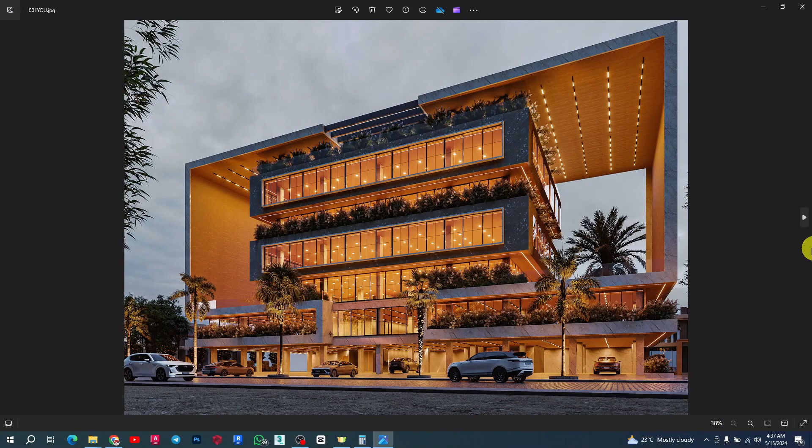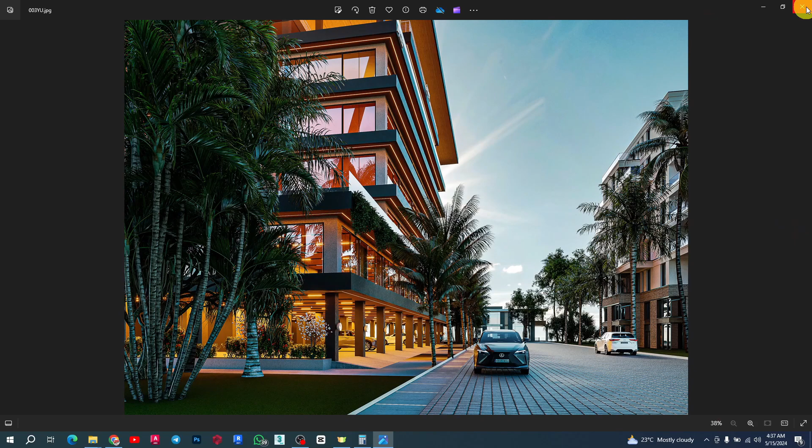The bad news is my client refused that I should expose the detail of his project to you guys. He said it's not good for him, he cannot accept that I do it on YouTube. So we are not going to work on this one, and we will not work on the third one either, because they are considering choosing either of them for their shopping center design. We proposed three designs, and they have to choose one. So they are going to choose among two, and we are left with just one option to go with.

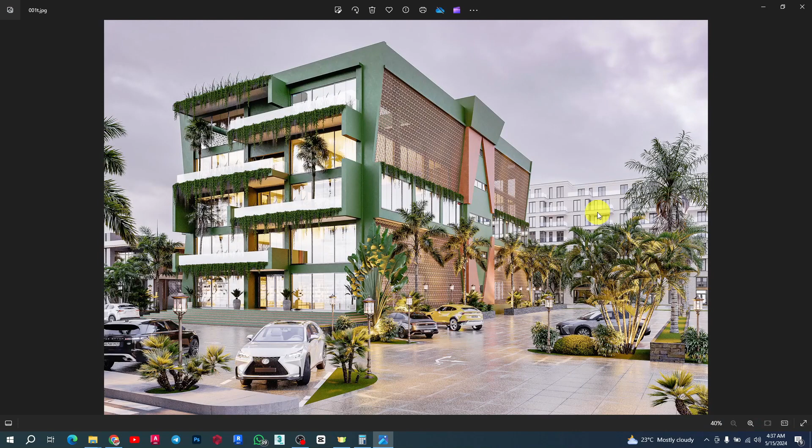The option we are going to go with is the second one that we had instead, so we'll be designing with this one from start to finish. I think this is not bad, it's the same principle that applies to the other one. So this is what we are going to be having. I'm going to show you how to achieve this by using curtain walls and all the tricks behind it, and how to render it to look like this, and do the structure. So without further ado, let's jump right into the tutorial.

We received a brief from a client who has a land measuring 40 by 70, that is about 2,800 square meters, and he needed a shopping center there.

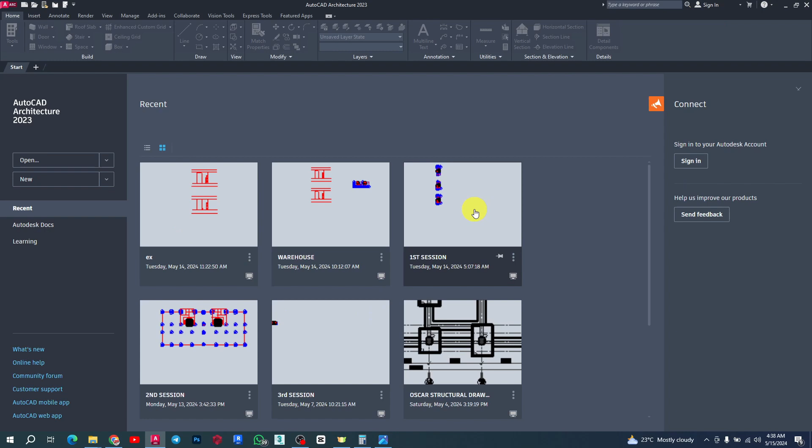Usually when we get briefs from clients, this is what we do, it's different from how any other person goes about it. We visit the site, do some site analysis, then try to sketch, do some pencil drawing to come out with shapes that will probably fit well, thinking about the aesthetics and ambience, and do some environmental impact assessment. We work around that to make sure we have a very good design that will suit the environment.

After that, we usually move to AutoCAD to do some line work, to come out and put the idea in place. We use that line work in AutoCAD to come out with some ideas.

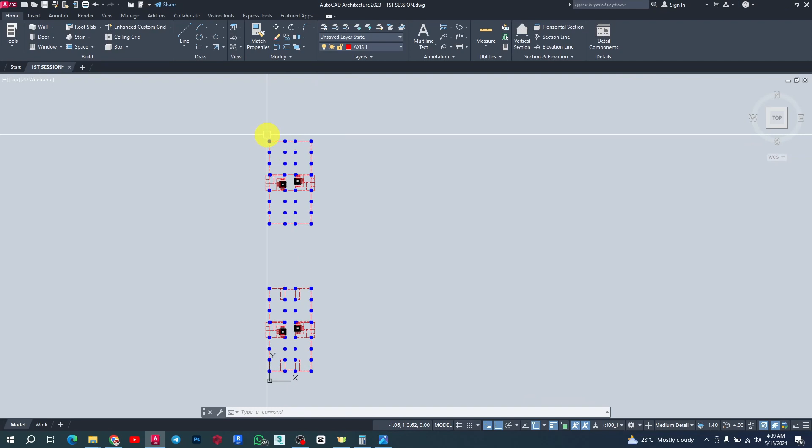On this project, the client has a land of 70 by 40, with a road on both sides of the land, on this side and on the other side, and both are main accessible roads. The client wanted a situation where they can access the building from both sides, so these are still part of his brief. You can enter the shopping center from this side or from the other side, as they are all main accessible roads.

He wanted a shopping center on the ground floor and also on the first floor, like the main supermarket itself, and on the second floor we're going to have shops divided for renters. None of the shops should have a surface area less than 30 square meters. I'm just reading through the brief, I will not want to expose all of that to you.

On the third floor, he wanted to have an African cuisine restaurant. The main focus is that everybody should pass through the shopping center on either side before going to the last floor. They should have a control and lobby area so people always have the opportunity to shop through the ground floor, probably when they are leaving, to buy one or two things.

We had to take care of the traffic at the ground floor, because this is still where we have the control post for payment. On the last floor, it's meant to be an open terrace used as open cabaret or snack bars, and it should also have two swimming pools on two sides of the building so people can be having live music this way and the other way, without being disturbed by activities on the other side.

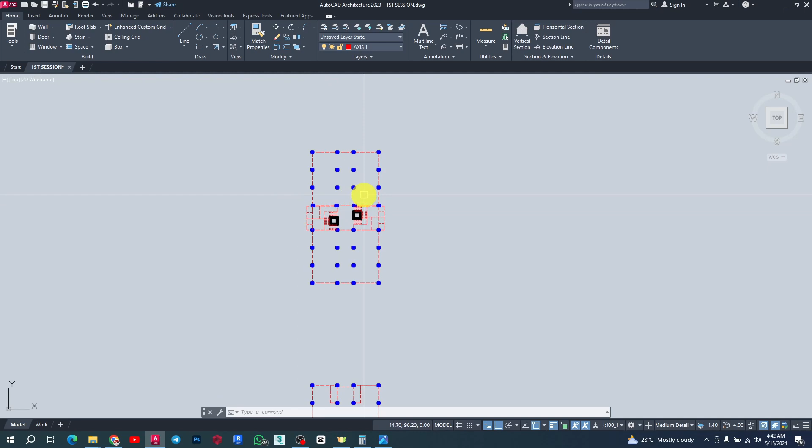And the other side too, and we still have the same thing on the first floor. All of these columns run from ground floor, from basement. There's a basement used just for storage, not for parking. It runs from basement up to the fourth floor, so all of the columns are continuing from the basement to the fourth floor.

What we have here is a main entrance, and the control post will still be on the same entrance point, on both sides of it. Then people enter through here and use either the lift or the staircase up.

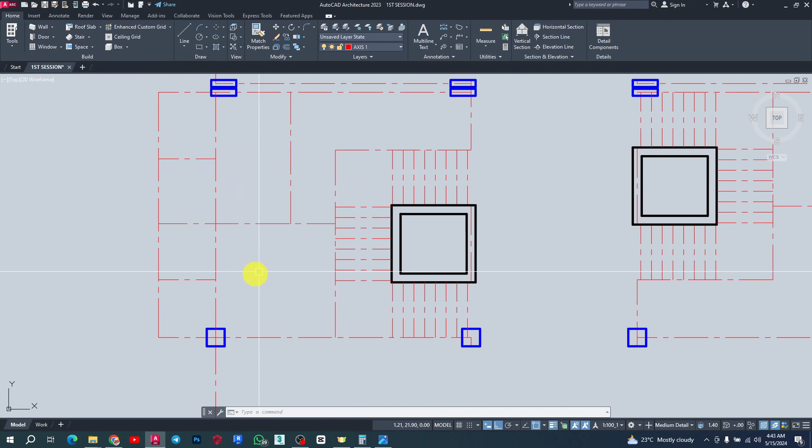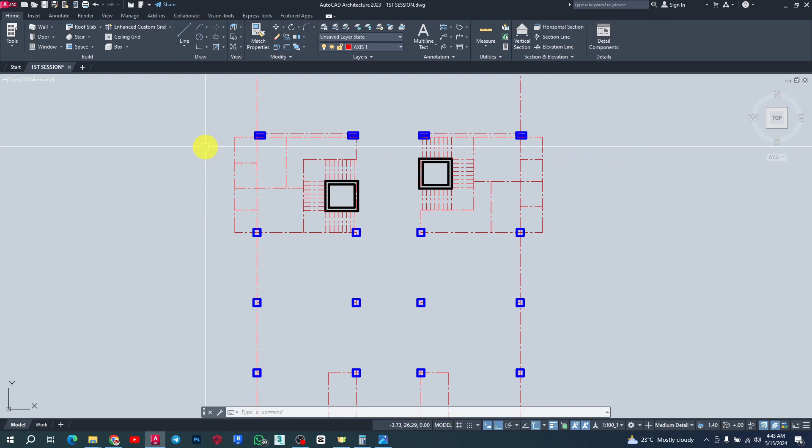On both sides of this circulation area, this lobby area, we have restrooms for both male and female sections, because we are going to have urinary pots here. We have it on both sides so people can use this without inconveniencing any activities, and they can be controlled on their way out. In terms of security, we won't put cameras in the restroom, but these are areas where we have really high criminal activity in most shopping areas.

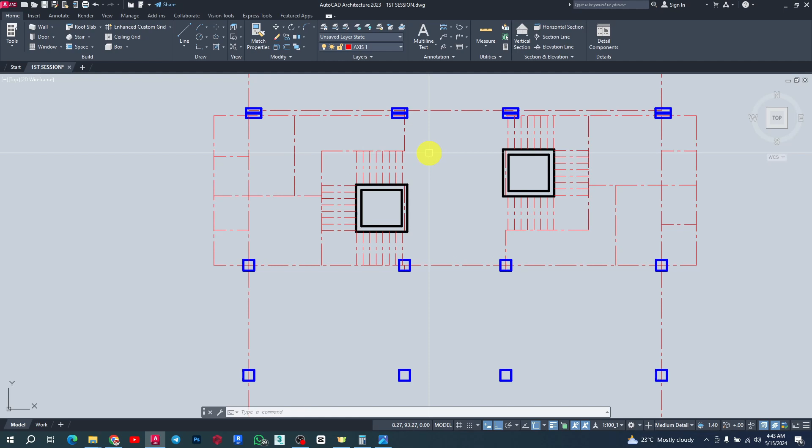So this is the idea of the basement itself. The two staircases will go down, and the lift will go down too, and probably we're going to have a lift pit of some sort here, but these lifts will have to go up. I don't think the staircase will go all the way down there, but we'll see about that.

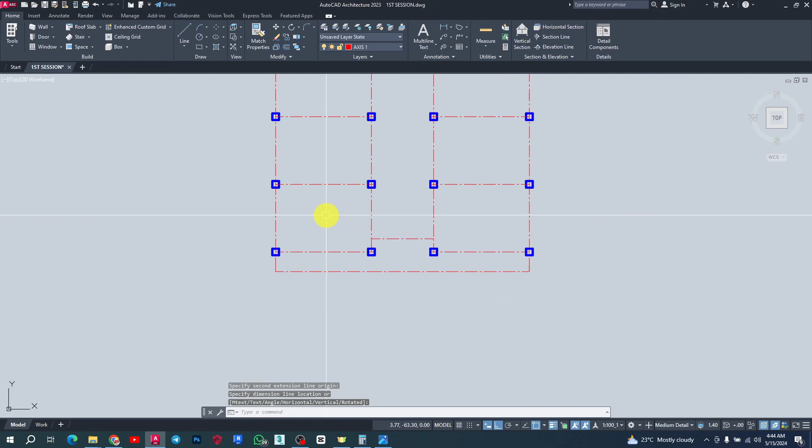So this is the ground floor, and this is the first floor. These are all shops of about 7 meters by 5 meters, so it's about 35 square meters per shop, 7.15 by 5.15. These are shop areas that will be given out for other businesses. 35 square meters is not a small spot, and we still have the same circulation system in place.

When you land here, going to the fourth floor, you don't have to come through the shops, but you can see the hallway before you move up. It can also be blocked with glass — we can have sliding glass doors that you have to open before you get through.

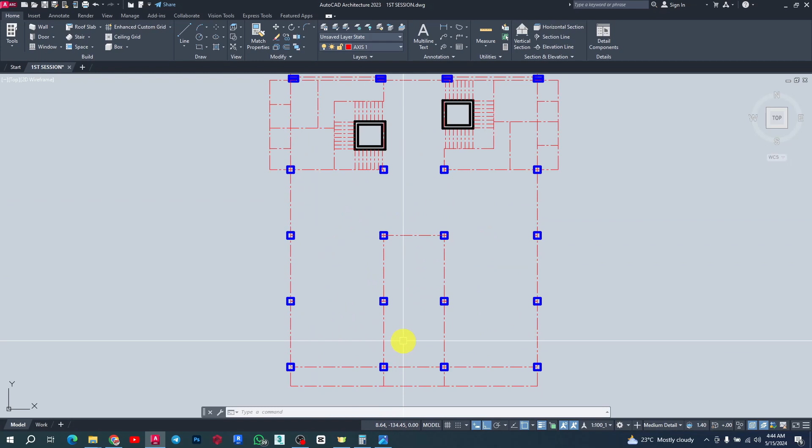But since the objective is selling out, we don't want to put doors and windows here, so that when people get here, they have the opportunity to meet somebody or buy something. So on the last floor, we have the first open cabaret area, and then the infinity swimming pool.

We have the swimming pool on the other side, so some people can be in the pool while live music is going on and stuff like that. About the stage, that will be decided. So that's just the idea we have, and we have modeled that already. I'm just showing you the finished product.

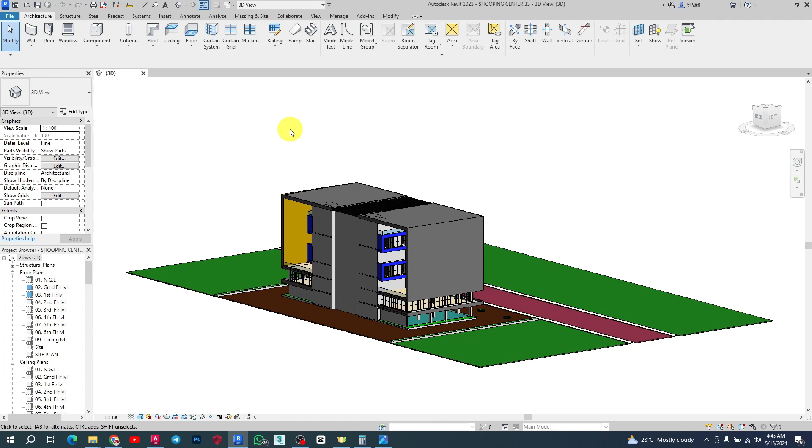Okay, I'm just waiting for it to load up. As I said, this is going to be a complete study. Sorry, I opened another one, the modeling for the other shopping center, not this one. So we are going to go to this one, and we're going to model everything from scratch.

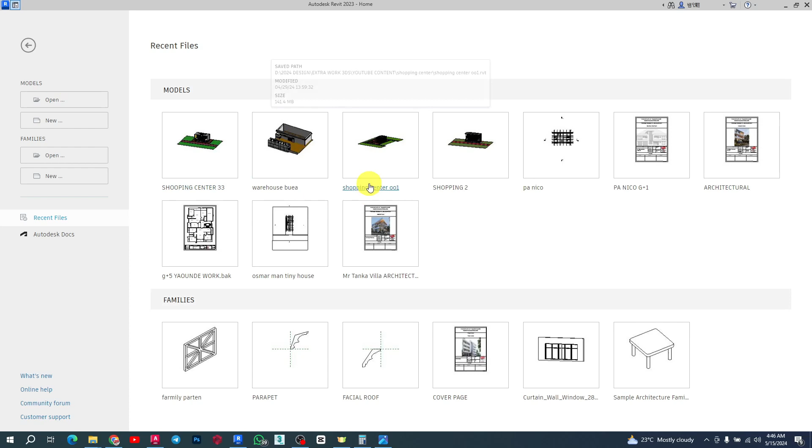I will not be hiding anything, so remember, I say it's a real life project. I don't know, somebody might probably pick this one along the way. These were all projects and designs that we thought of, and I think this one is it.

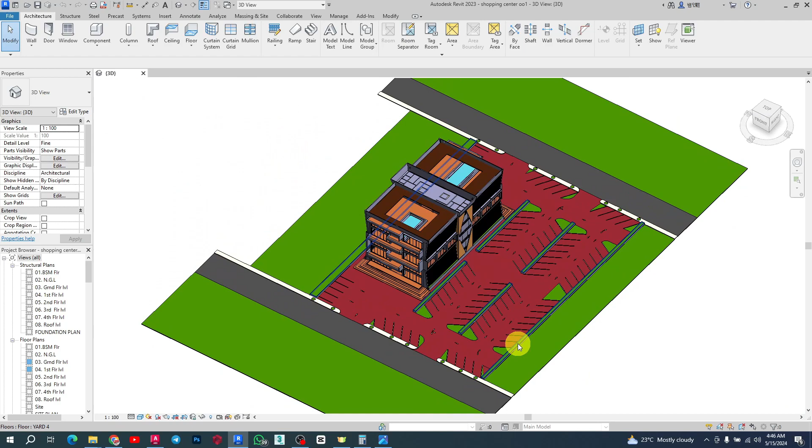The land measures 70 meters like this, and then we have 40 meters on the other side. The advice we gave the client is that he can use this one like a sports center, because the parking here is for about 100 vehicles. I think that is already much for a shopping center of this small size.

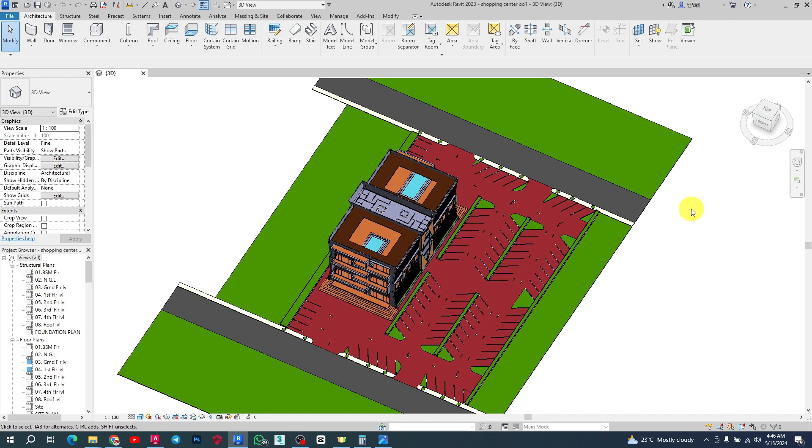So these are the swimming pools on top of it here. He could probably want to use this part as a sporting ground, and just leave around 50 space for 50 vehicles. I think that is enough because people are not going to be sleeping there, and again it's not an event center where people come and stay the whole day.

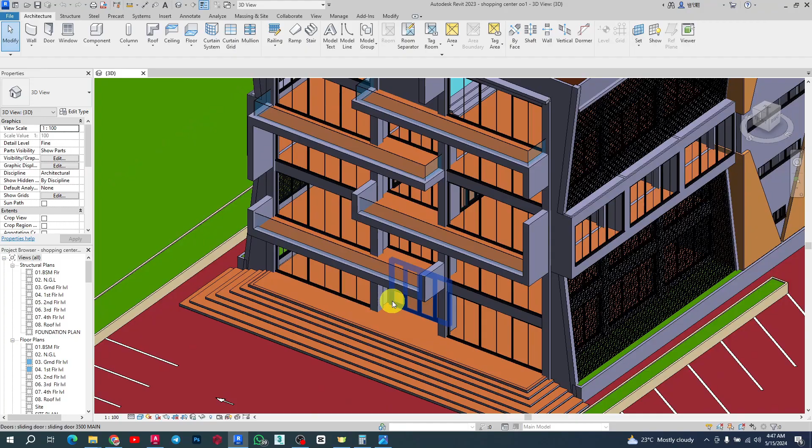So this is the design. As I said, I'm going to show you how you achieve this thing using what we call curtain walls. I also have a library of all these windows and doors and my templates that I bought. I don't think I'm going to share this template for free because I bought it anyway.

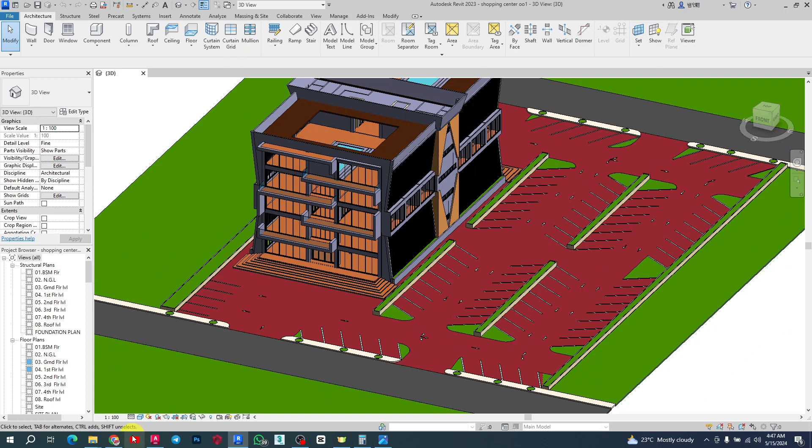So with that out of the way, I think we should start something today and then kick off ourselves. So this one will be part two, just explaining the whole project, and I'll be dropping the second video again today. So two videos we'll have on the channel. I don't want it to be too long, so that you get time to really watch them well and practice what we are doing here.